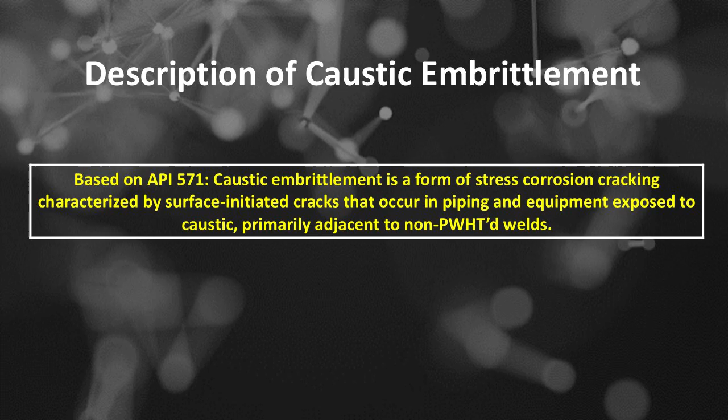Caustic stress corrosion cracking or caustic embrittlement damage mechanisms as a part of environment-assisted cracking. Description based on API 571. Caustic embrittlement is a form of stress corrosion cracking characterized by surface-initiated cracks that occur in piping and equipment exposed to caustic, primarily adjacent to non-PWHT'd welds. Here's a detailed description of caustic stress corrosion cracking or caustic embrittlement.

Introduction. Caustic stress corrosion cracking or CSCC, commonly known as caustic embrittlement, is a form of environmentally assisted cracking that occurs in metallic components exposed to caustic, alkaline environments under tensile stress. It is characterized by the initiation and propagation of cracks due to combined effects of mechanical stress and chemical environment, leading to material failure.

Fundamental mechanisms of caustic embrittlement. Chemical environment: the primary chemical agent involved is hydroxide ions, typically present in high concentrations in boiler water systems, especially in the vicinity of concentrated sodium hydroxide, potassium hydroxide, or other alkaline solutions.

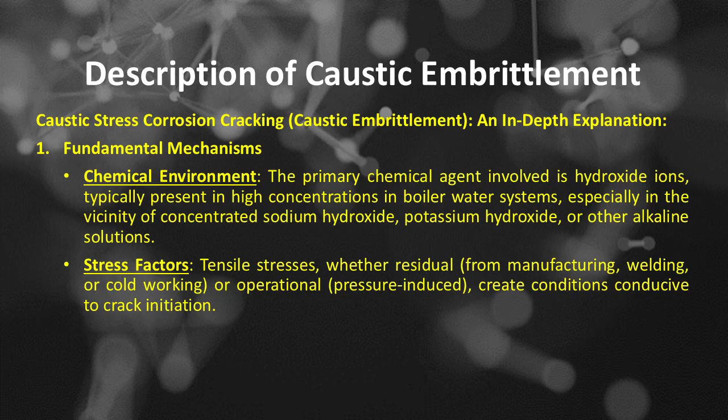Stress factors: tensile stresses, whether residual from manufacturing, welding, or cold working, or operational, pressure-induced, create conditions conducive to crack initiation. Crack initiation: surface or subsurface microstructural flaws or inclusions act as initiation sites, especially in areas of high tensile stress concentrations.

Crack propagation: once cracks form, the caustic environment facilitates crack growth via a process called caustic cracking, which is enhanced by localized chemical reactions at the crack tip, weakening the material along the crack front.

Detailed process of caustic embrittlement. A: buildup of alkaline concentration. In boiler systems, impurities such as sodium, potassium, or lithium compounds can concentrate in crevices, deposit areas, or corrosion products, raising local alkalinity. Water chemistry deviations, such as inadequate blowdown or pH control, increase the likelihood of high hydroxide ion concentration.

Process of caustic embrittlement. B: residual and operational stresses. Components like boiler tubes, welds, or fittings often harbor residual stresses from manufacturing or welding. Operating pressures induce tensile stresses that, combined with residual stresses, exceed the material's resistance to crack initiation.

Process of caustic embrittlement. C: crack initiation. Microcracks or flaws at the surface or within the material are exposed to the caustic environment. The high pH environment facilitates localized electrochemical reactions at flaws, weakening the material along grain boundaries or inclusions.

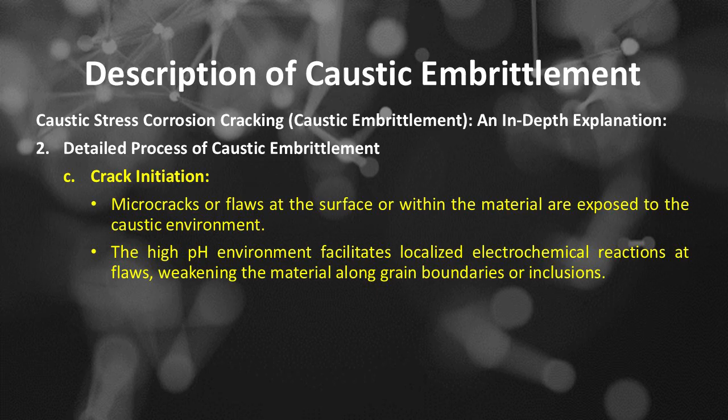Process of caustic embrittlement. D: crack growth. The caustic environment acts as an aggressive medium, promoting caustic cracking or embrittlement. The mechanism involves stress-assisted corrosion, where the chemical reactions at the crack tip cause material loss, further propagating the crack.

Process of caustic embrittlement. E: intergranular or transgranular fracture. Cracks can propagate along grain boundaries, intergranular, or through grains, transgranular, depending on alloy composition, microstructure, and environment.

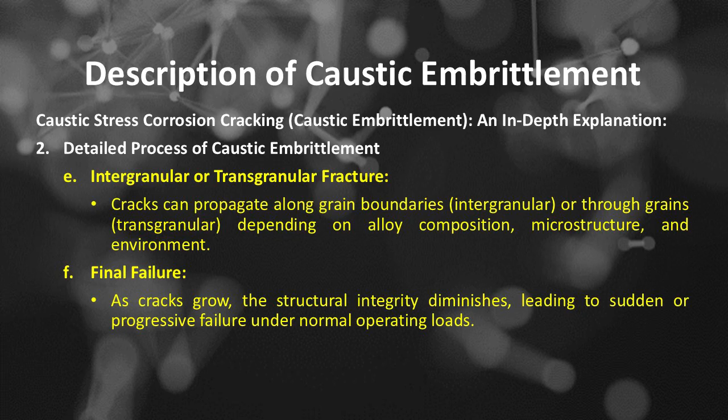Process of caustic embrittlement. F: final failure. As cracks grow, the structural integrity diminishes, leading to sudden or progressive failure under normal operating loads.

Visual symptoms and damage manifestations of caustic embrittlement: it can be visualized as cracks, usually surface breaking or subsurface cracks aligned with stress directions. It can be visualized as metal loss, localized thinning or pitting due to corrosion. It shows embrittlement zones, where areas near welds or stress concentrators show signs of cracking, and it can result in sudden failure, often occurring without significant prior warning, especially in high-stress regions.

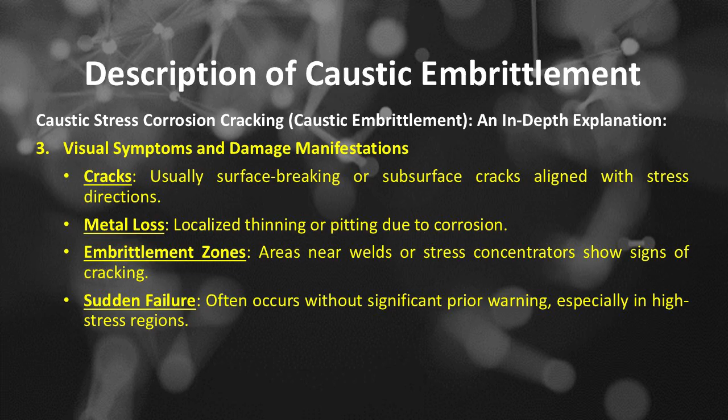Prevention and control measures of caustic embrittlement. A: water chemistry management. Maintain proper pH levels and alkalinity control, use of high-quality feedwater and effective blowdown procedures. Avoid impurity buildup in crevices or deposit zones.

Prevention and control. B: stress management. Reduce residual stresses via stress relief heat treatments. Design components to minimize stress concentrations. Regular inspection and removal of stress risers.

Prevention and control. C: material selection. Use of resistant alloys or materials less susceptible to caustic cracking. Avoiding materials prone to embrittlement in alkaline environments.

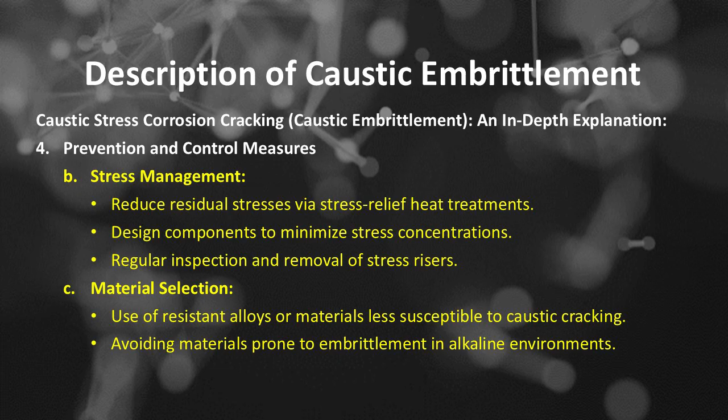Prevention and control. D: protective coatings and surface treatments, applying corrosion-resistant coatings to prevent exposure, use of surface treatments to reduce surface flaws. E: monitoring and inspection, regular non-destructive testing or NDT such as ultrasonic testing, dye penetrant, or magnetic particle inspection to detect early cracks. Monitoring water chemistry parameters continuously.

Caustic stress corrosion cracking, or caustic embrittlement, is a destructive process that occurs when tensile stresses and high alkalinity environments synergistically cause crack initiation and propagation in susceptible metals, particularly in boiler and pressure vessel systems. It is characterized by intergranular or transgranular cracking, often leading to sudden failure if not detected early.

Effective prevention involves controlling water chemistry, reducing residual stresses, selecting appropriate materials, and implementing rigorous inspection regimes. Understanding the detailed mechanisms enables engineers and maintenance personnel to design, operate, and maintain systems that are resilient against this form of environmentally assisted cracking.

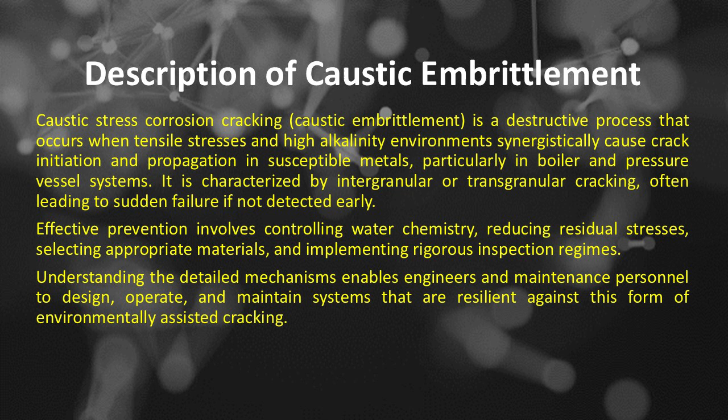Caustic stress corrosion cracking or caustic embrittlement, based on API 571, will affect carbon steel, low alloy steels, and 300 series stainless steels are susceptible.

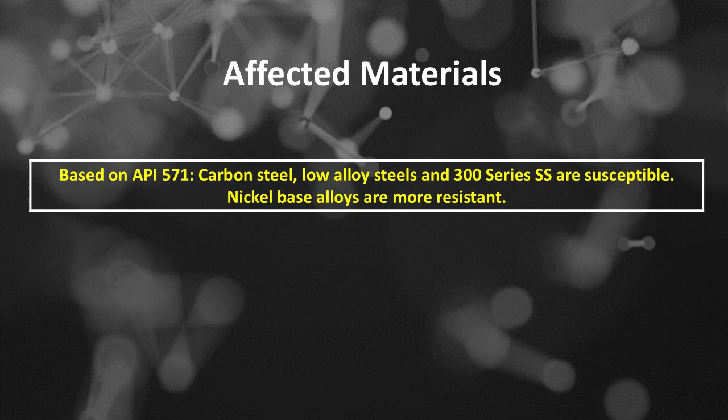Nickel base alloys are more resistant. Here's a comprehensive and detailed explanation of materials affected by caustic stress corrosion cracking or caustic embrittlement.

Overview: Caustic stress corrosion cracking, or CSCC, also known as caustic embrittlement, predominantly affects specific metals and alloys that are susceptible to chemical attack in high pH, alkaline environments under tensile stress. Understanding which materials are vulnerable is crucial for selecting appropriate materials for high-risk environments, especially in power plants, boilers, and chemical processing facilities.

Materials affected by caustic stress corrosion cracking or caustic embrittlement damage include: Number 1, primary susceptible materials. Number A, carbon steels and low alloy steels. These are the most susceptible materials to caustic embrittlement due to their microstructure and chemical composition. Carbon steels contain primarily iron and carbon, with minimal alloying elements. They are widely used in boiler components, piping, and pressure vessels. When operating in environments with high alkalinity and residual tensile stresses, cracks tend to initiate and propagate along grain boundaries, especially along microstructural features.

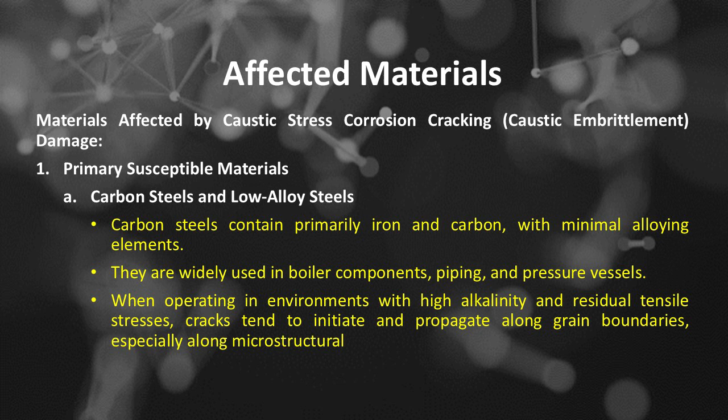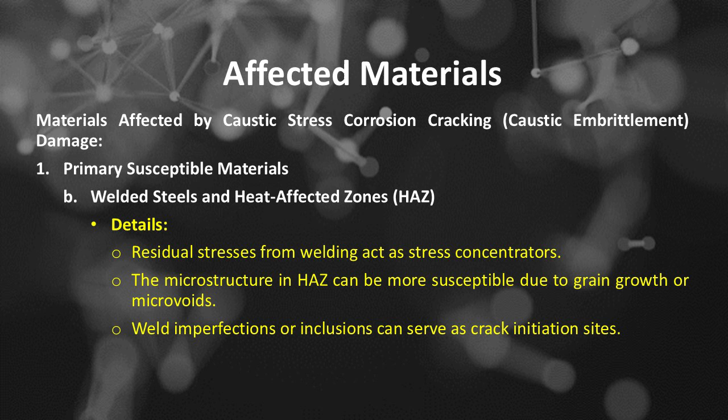Number B, welded steels and heat-affected zones. Welded joints and HAZ are particularly vulnerable because welding introduces residual stresses and microstructural changes. Here's detail of welded steels and heat-affected zones affected by CSCC: residual stresses from welding act as stress concentrators. The microstructure in the HAZ can be more susceptible due to grain growth or microvoids. Weld imperfections or inclusions can serve as crack initiation sites.

Number 2 of materials affected by caustic stress corrosion cracking or caustic embrittlement damage is susceptible alloy types, including: Number A, cast steels with certain microstructures and compositions are prone to caustic cracking. Details of cast steels affected by CSCC: especially susceptible when casting defects or microvoids exist. The coarse microstructure can facilitate crack propagation along grain boundaries.

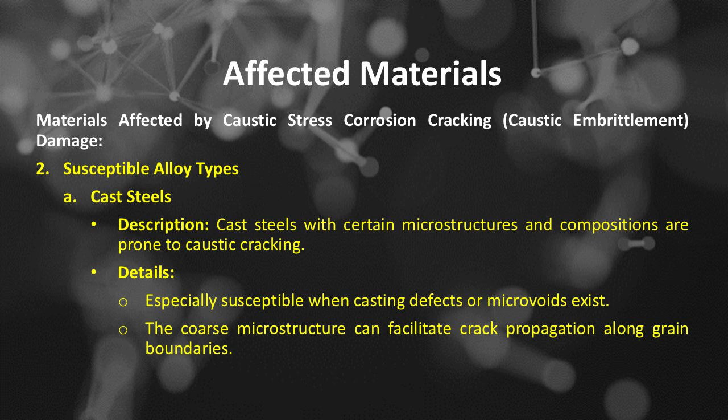Number B, low to medium alloy steels. Alloys such as low alloy steels may have some resistance but can still be affected under severe conditions. Details of low to medium alloy steels affected by CSCC: alloying elements like chromium or nickel may improve resistance but do not eliminate susceptibility entirely.

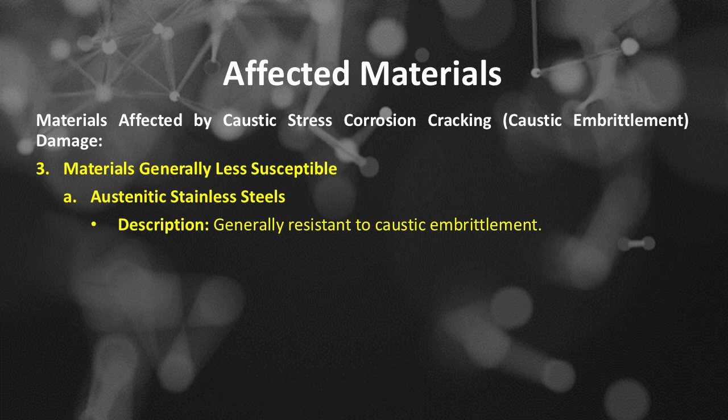Number 3 of materials affected by caustic stress corrosion cracking or caustic embrittlement damage is materials generally less susceptible, including: Number A, austenitic stainless steels, generally resistant to caustic embrittlement. Details: austenitic stainless steels, such as 304 and 316, have high chromium and nickel content, which form a protective oxide layer. They are less susceptible because their microstructure is stable in high pH environments and less prone to intergranular attack. However, under certain conditions, such as high residual stresses, very high alkalinity, or specific microstructural features, they may still be at risk.

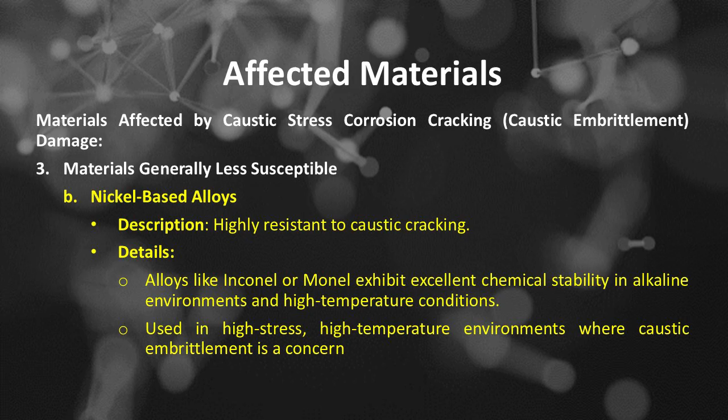Number B, nickel-based alloys, highly resistant to caustic cracking. Details of nickel-based alloys affected by CSCC: alloys like Inconel or Monel exhibit excellent chemical stability in alkaline environments and high-temperature conditions, used in high-stress, high-temperature environments where caustic embrittlement is a concern.

Number 4 of materials affected by caustic stress corrosion cracking or caustic embrittlement damage is factors influencing material susceptibility. Number A, microstructure: fine-grained structures tend to be more resistant than coarse-grained microstructures. Presence of microvoids, inclusions, or grain boundary precipitates increases susceptibility.

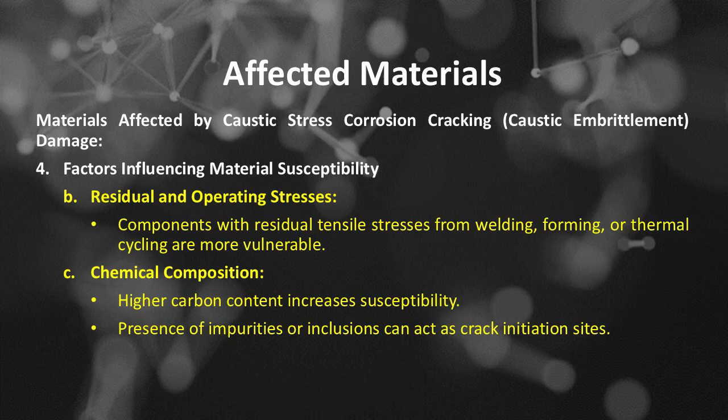Number B of factors influencing material susceptibility to caustic embrittlement is residual and operating stresses. Components with residual tensile stresses from welding, forming, or thermal cycling are more vulnerable. Number C, chemical composition: higher carbon content increases susceptibility. Presence of impurities or inclusions can act as crack initiation sites.

Number D of factors influencing material susceptibility to caustic embrittlement is temperature. Elevated temperatures, above 130 degrees Celsius or 266 degrees Fahrenheit, accelerate embrittlement mechanisms.

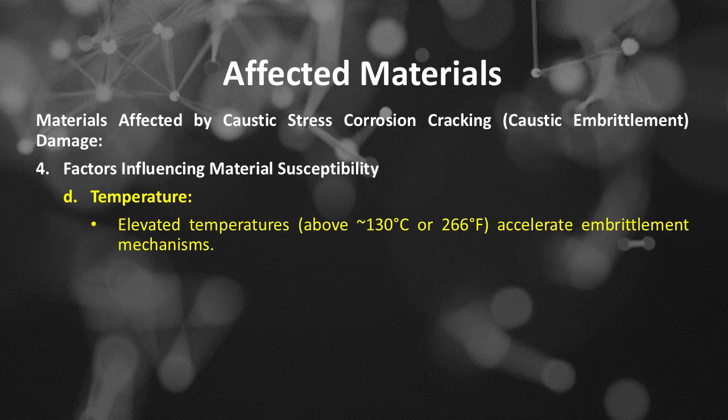In summary, carbon steels and low-alloy steels are most vulnerable to caustic stress corrosion cracking or caustic embrittlement. Their susceptibility is primarily due to their microstructure, residual stresses, and chemical composition. Welded components and heat-affected zones are particularly at risk because of residual stresses and microstructural heterogeneity. Conversely, austenitic stainless steels and nickel alloys generally have high resistance, making them suitable choices where caustic environments are present.

Proper material selection, stress management, water chemistry control, and regular inspection are vital to prevent or mitigate caustic embrittlement in susceptible materials. Caustic stress corrosion cracking, caustic embrittlement damage: critical factors based on API 571.

Number A, susceptibility to caustic embrittlement in caustic soda and caustic potash solutions is a function of caustic strength, metal temperature, and stress levels. Number B, increasing caustic concentration and increasing temperatures increase the likelihood and severity of cracking. Conditions likely to result in cracking have been established through plant experience and are presented in Figure 4-146, recommended operating limits for carbon steel in caustic service.

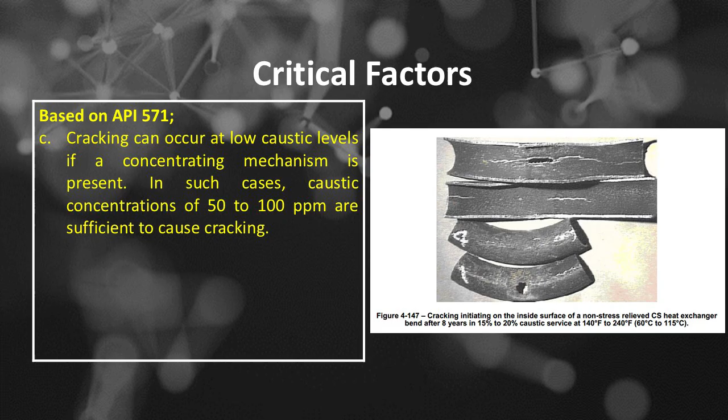Number C, cracking can occur at low caustic levels if a concentrating mechanism is present. In such cases, caustic concentrations of 50 to 100 ppm are sufficient to cause cracking. Number D, stresses that promote cracking can be residual, resulting from welding or from cold working such as bending and forming, as well as applied stresses. See Figure 4-147.

Cracking initiating on the inside surface of a non-stress relieved carbon steel heat exchanger bend after 8 years in 15% to 20% caustic service at 140 to 240 degrees Fahrenheit (60 to 115 degrees Celsius). See Figure 4-148, photomicrograph of a crack in the tube shown in Figure 4-147.

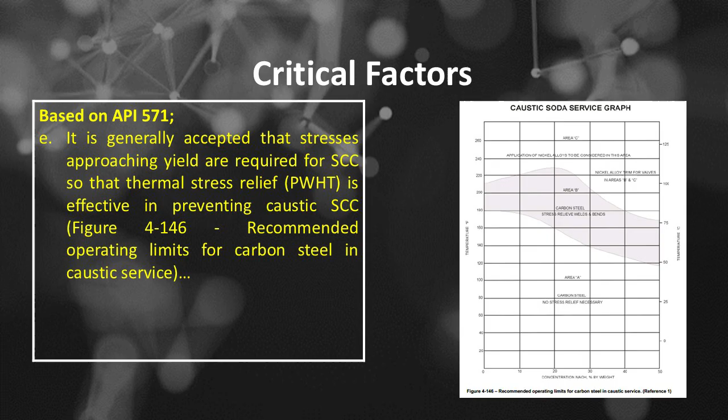It is generally accepted that stresses approaching yield are required for SCC, so thermal stress relief or PWHT is effective in preventing caustic SCC. See Figure 4-146, recommended operating limits for carbon steel in caustic service. Although failures have occurred at stresses low relative to yield, they are considered more rare.

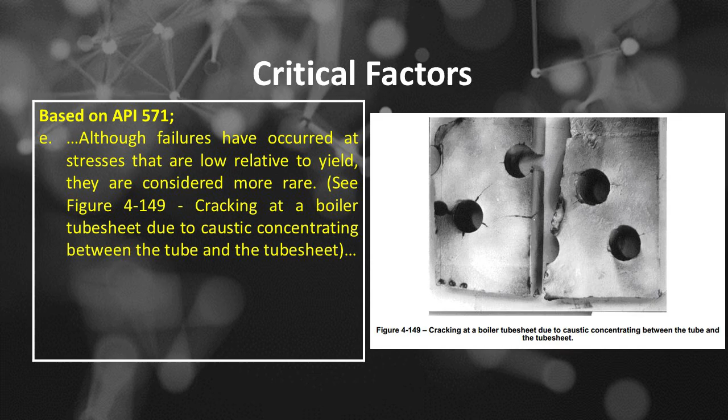See Figure 4-149, cracking at a boiler tube sheet due to caustic concentrating between the tube and the tube sheet. See Figure 4-150, photomicrograph of a crack in the tube sheet shown in Figure 4-149.

Crack propagation rates increase dramatically with temperature and can sometimes grow through wall in a matter of hours or days during temperature excursions, especially if conditions promote caustic concentration. Concentration can occur as a result of alternating wet and dry conditions, localized hot spots, or high-temperature steam out.

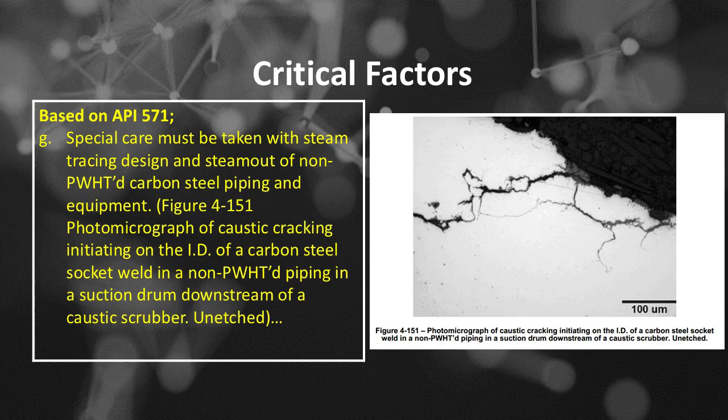Special care must be taken with steam tracing design and steam out of non-PWHT'd carbon steel piping and equipment. See Figure 4-151, photomicrograph of caustic cracking initiating on the ID of a carbon steel socket weld in non-PWHT'd piping in a suction drum downstream of a caustic scrubber, unetched. See Figure 4-152, Figure 4-151 in the etched condition.

Here's a comprehensive and detailed explanation of the critical factors influencing caustic stress corrosion cracking, or caustic embrittlement. Caustic embrittlement results from the complex interplay of environmental, material, and operational factors. Understanding these critical factors is essential for predicting, preventing, and controlling this form of damage. Here are the details of critical factors of caustic embrittlement.

Number 1 is chemical environment factors. Factor A is alkalinity, or high pH, or high concentration of hydroxide ions. Elevated concentrations of hydroxide ions increase the likelihood of caustic cracking. Localized high alkalinity often occurs in crevices, deposit areas, or regions with impurity accumulation. Excessive alkalinity facilitates localized electrochemical reactions at crack tips, weakening grain boundaries.

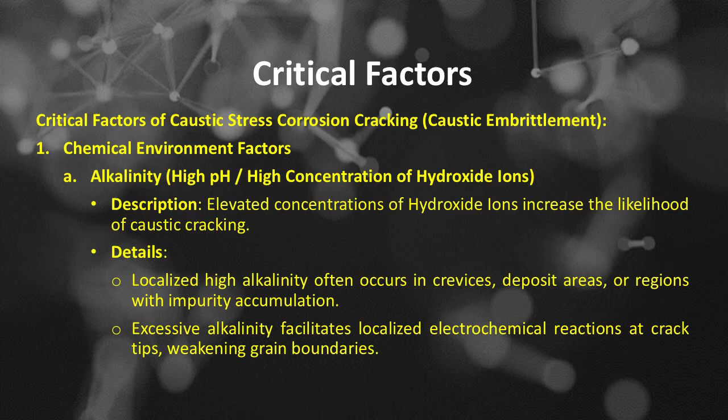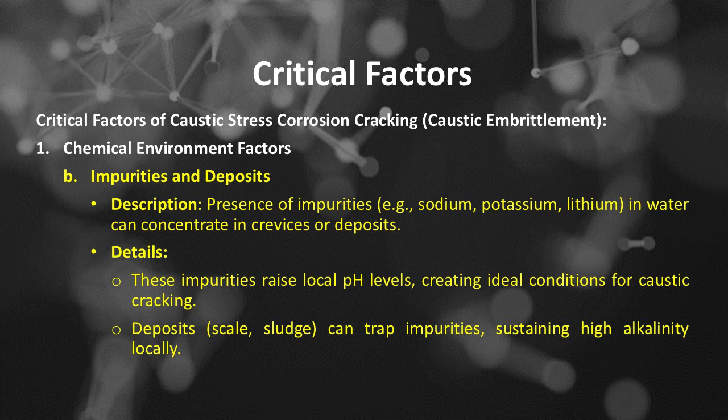Factor B of chemical environment factors is impurities and deposits. Presence of impurities, such as sodium, potassium, and lithium in water, can concentrate in crevices or deposits. These impurities raise local pH levels, creating ideal conditions for caustic cracking. Deposits, scale, and sludge can trap impurities, sustaining high alkalinity locally.

Factor C of chemical environment factors is water chemistry control. Poor water chemistry management leads to increased susceptibility. Inadequate blowdown, pH control, or impurity removal causes alkalinity buildup. Maintaining proper water chemistry is essential to reduce caustic embrittlement risk.

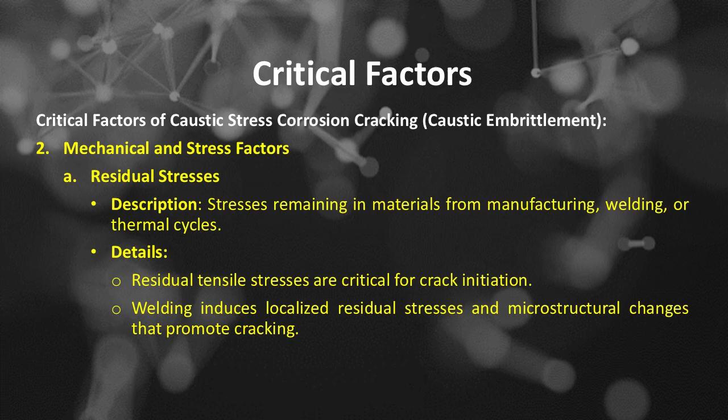Number 2 of critical factors of caustic stress corrosion cracking, or caustic embrittlement, is mechanical and stress factors, including Factor A, residual stresses: stresses remaining in materials from manufacturing, welding, or thermal cycles. Residual tensile stresses are critical for crack initiation. Welding induces localized residual stresses and microstructural changes that promote cracking.

Factor B of mechanical and stress factors is operating stresses: external or internal stresses due to pressure, temperature, or operational loads. High internal pressure in boilers or pipes causes tensile stresses. Thermal stresses during startup/shutdown cycles contribute to stress levels.

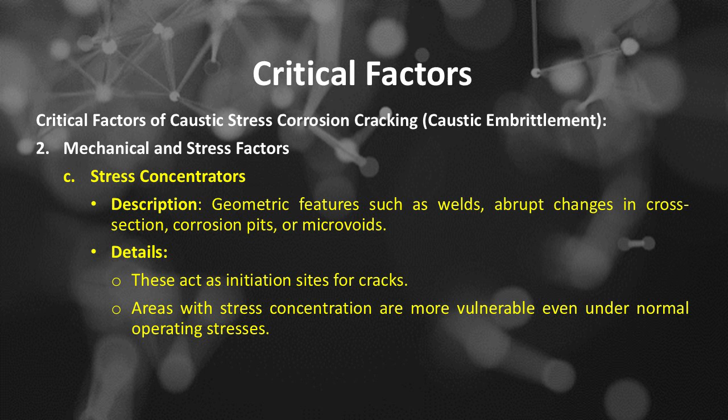Factor C of mechanical and stress factors is stress concentrators: geometric features such as welds, abrupt changes in cross-section, corrosion pits, or microvoids. These act as initiation sites for cracks. Areas with stress concentration are more vulnerable even under normal operating stresses.

Material factors of caustic embrittlement include Factor A, microstructure and composition: microstructural features influence susceptibility. Critical factors include coarse-grained microstructures and grain boundary precipitates that facilitate crack initiation. High carbon content and certain inclusions increase vulnerability. Microvoids and microcracks serve as initiation points.

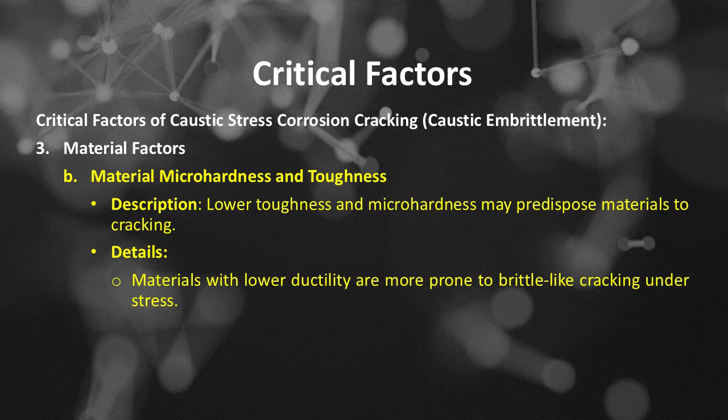Factor B of material factors of caustic embrittlement is material microhardness and toughness: lower toughness and microhardness may predispose materials to cracking. Materials with lower ductility are more prone to brittle-like cracking under stress.

Factor C of material factors of caustic embrittlement is microstructural changes from welding: welding modifies the microstructure and induces residual stresses. Heat-affected zones often have altered grain structures that are more susceptible.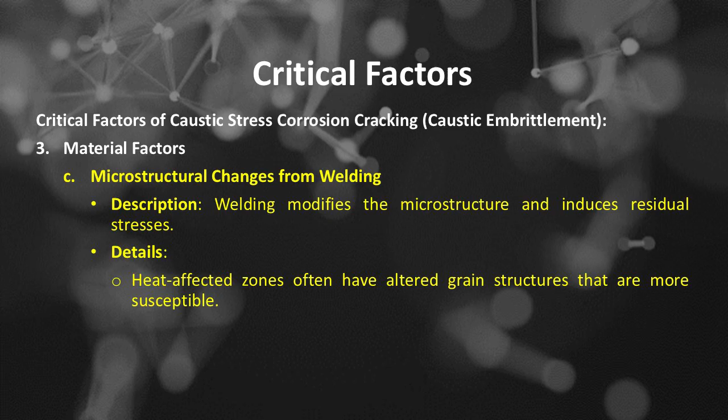Critical factor number 4 is environmental and operational factors, including temperature. Elevated temperatures accelerate chemical reactions and embrittlement processes. Temperatures above approximately 130 degrees Celsius (266 degrees Fahrenheit) increase susceptibility. Higher temperatures also reduce material toughness.

Environmental and operational factor B is duration of exposure. Longer exposure times allow cracks to initiate and propagate. Cumulative effects over operational cycles increase damage likelihood.

Environmental and operational factor C is presence of crevices or deposit areas, where water chemistry cannot be easily controlled. Crevices, deposit layers, or areas with poor circulation trap impurities and concentrate alkalinity.

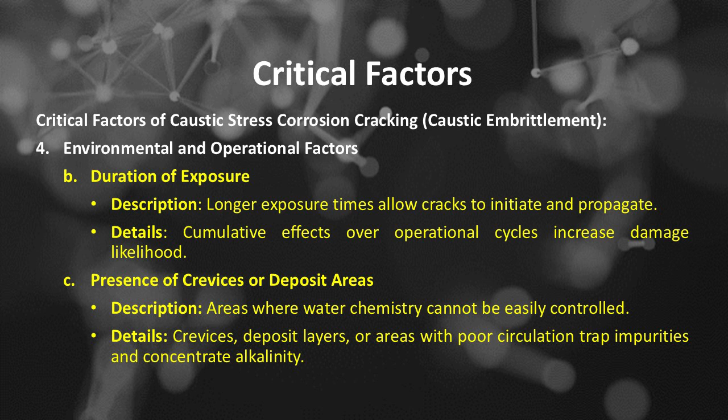Additional critical factors of caustic stress corrosion cracking, or caustic embrittlement: Factor A, microstructural heterogeneities. Variations in microstructure, such as grain size and inclusions, serve as nucleation sites for crack initiation.

Additional factor B, surface conditions: surface roughness, corrosion pits, or flaws. Surface imperfections act as stress concentrators and crack initiation sites.

Additional factor C, component design: design features influencing flow and chemical distribution. Poorly designed systems may promote crevice formation and localized chemical environments.

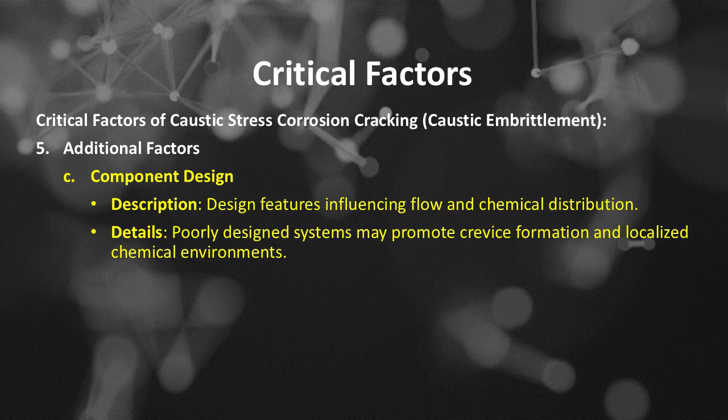Interdependence: these factors often act synergistically. For example, residual stresses combined with high alkalinity in crevices significantly increase the risk.

Control strategies: to mitigate caustic embrittlement, it is essential to manage water chemistry, minimize residual stresses, avoid design features that promote crevice formation, and select resistant materials.

Caustic stress corrosion cracking or caustic embrittlement damage affected units or equipment based on API 571. A, caustic embrittlement is often found in piping and equipment that handles caustic, including H2S and mercaptan removal units, as well as equipment that uses caustic for neutralization in sulfuric acid alkylation units and HF alkylation units.

Caustic is sometimes injected into the feed to the crude tower for chloride control. B, failures have occurred in improperly heat-traced piping or equipment as well as heating coils and other heat transfer equipment. C, caustic embrittlement may occur in equipment as a result of steam cleaning after being in caustic service.

D, traces of caustic can become concentrated in BFW and can result in caustic embrittlement of boiler tubes that alternate between wet and dry conditions due to overfiring.

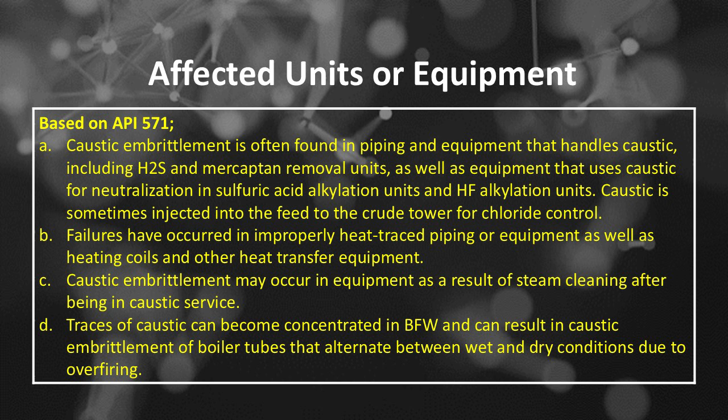Here's a detailed explanation of the units and equipment affected by caustic stress corrosion cracking or caustic embrittlement. Caustic embrittlement predominantly impacts equipment and units operating in high-temperature, high-alkalinity environments, especially within thermal power plants, chemical processing facilities, and other industrial systems involving boiler and piping components.

Units and equipment affected by caustic embrittlement: number 1 is boilers and boiler components, includes A, boiler shells and pressure parts. The boiler shell and pressure vessels are exposed to high-temperature water or steam, making them highly susceptible.

Caustic cracking can initiate along welds, microvoids, or microcracks in the shell or tube sheets. Corrosion and cracking often occur in crevice-like regions where deposits or scale concentrate alkalinity.

B, water walls and refractory-lined sections. The water walls, furnace walls with water tubes, are exposed to hot, high alkaline water, especially in areas with poor water circulation or deposit buildup.

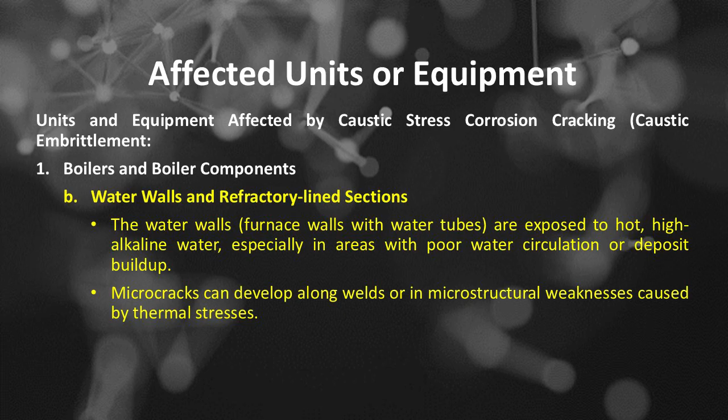Microcracks can develop along welds or in microstructural weaknesses caused by thermal stresses. Boiler component C, economizer and superheater tubes. These tubes operate at high temperatures and are exposed to corrosive environments, especially when deposit buildup occurs. Cracks can propagate along welds or at locations with residual stress.

Next, number 2 of units and equipment affected by caustic embrittlement is piping systems, includes A, high-pressure steam and water pipelines. Piping conveying superheated steam or hot water can develop cracks, especially at weld joints, bends, or constrictions. Areas with crevice-like features or deposits are more vulnerable.

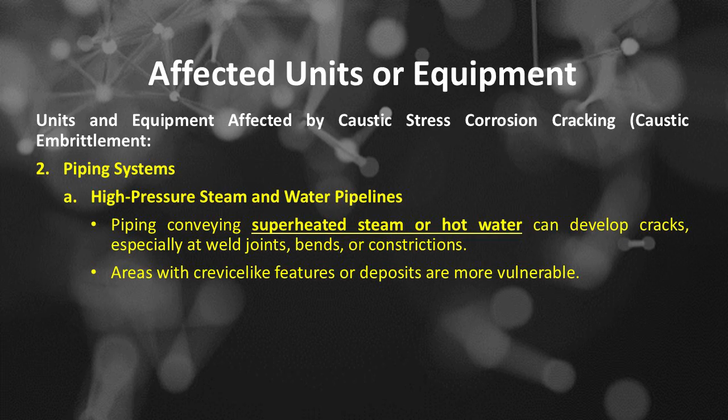Piping systems B, feed water and condensate lines. These lines often contain high pH water and are susceptible to caustic attack at welds or microvoids. Microcracking may occur during thermal cycling.

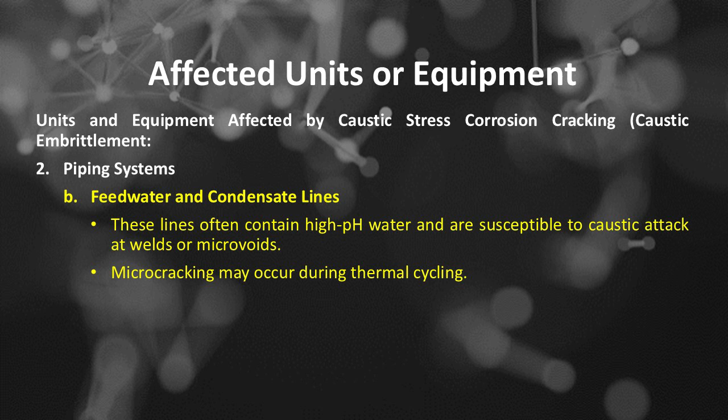Number 3 of units and equipment affected by caustic embrittlement is welded joints and heat-affected zones. Welds are common sites for crack initiation due to residual stresses and microstructural changes. The HAZ experiences grain growth and microstructural heterogeneity, making it vulnerable. Cracks often propagate along grain boundaries in the weld metal or HAZ.

Number 4 of units and equipment affected by caustic embrittlement is valves and fittings. Valves, especially those with welds or microstructural discontinuities, are at risk. Cracking can occur at sealing surfaces or in the body due to residual stresses and high-temperature caustic environment.

Number 5 of units and equipment affected by caustic embrittlement is supercritical and ultra-supercritical units. These advanced units operate at very high pressures and temperatures. The associated components such as turbine blades, casings, and boiler pressure parts can be affected, especially if water chemistry is not properly controlled.

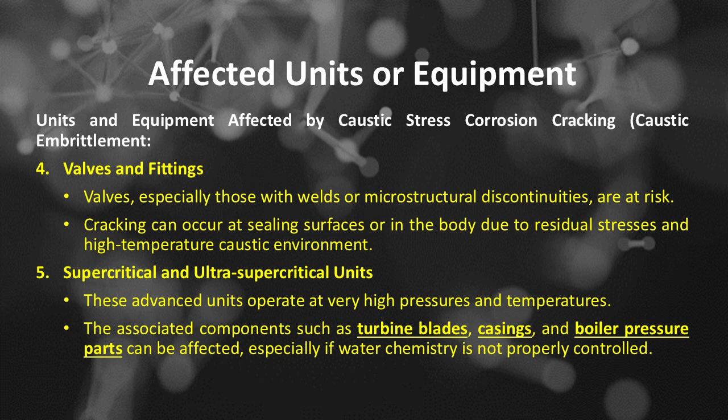Number 6 of units and equipment affected by caustic embrittlement is condensers and heat exchangers. Although less common, areas with high residual stresses or microstructural heterogeneity can suffer from caustic cracking if exposed to high alkaline environments.

Number 7 of units and equipment affected by caustic embrittlement is chemical reactors and processing units. In chemical industry, equipment handling high pH chemicals or operating at high temperatures and pressures may be vulnerable. Welded vessels, piping, and reactors are susceptible if operating conditions favor caustic embrittlement.

Additional insights of caustic stress corrosion cracking or caustic embrittlement. Location-specific vulnerability: caustic embrittlement tends to occur inside crevices or deposit areas where high pH conditions develop locally. Welded areas are high-risk zones because of residual stresses and microstructural changes.

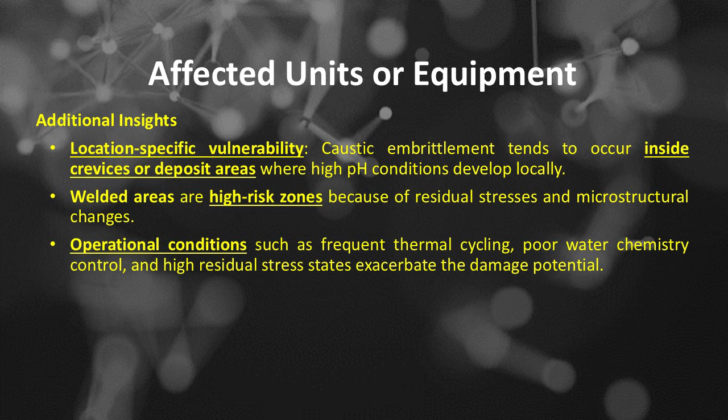Operational conditions such as frequent thermal cycling, poor water chemistry control, and high residual stress states exacerbate the damage potential.

Appearance or morphology of caustic stress corrosion cracking or caustic embrittlement based on API 571. Number A: Caustic stress corrosion cracking typically propagates parallel to the weld and adjacent base metal but can also occur in the weld deposit or heat-affected zones. Number B: The pattern of cracking observed on the steel surface is sometimes described as a spider web of small cracks which often initiate at or interconnect with weld-related flaws that serve as local stress risers.

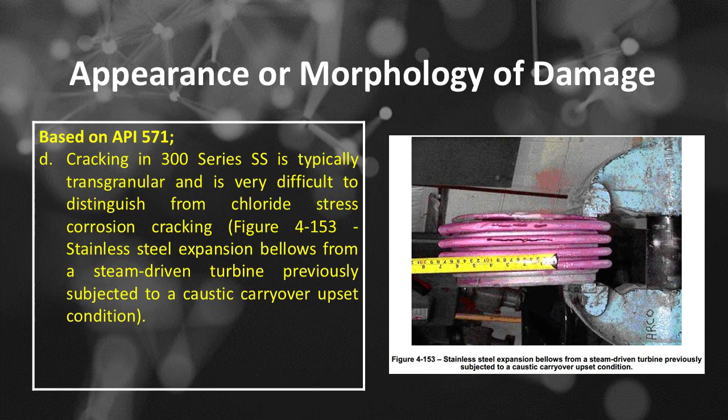Number C: Cracks can be confirmed through metallographic examination as surface-breaking flaws that are predominantly intergranular. The cracking typically occurs in as-welded carbon steel fabrications as a network of very fine, oxide-filled cracks. Number D: Cracking in 300 series SS is typically transgranular and is very difficult to distinguish from chloride stress corrosion cracking. See Figure 4-153: Stainless steel expansion bellows from a steam-driven turbine previously subjected to a caustic carryover upset condition.

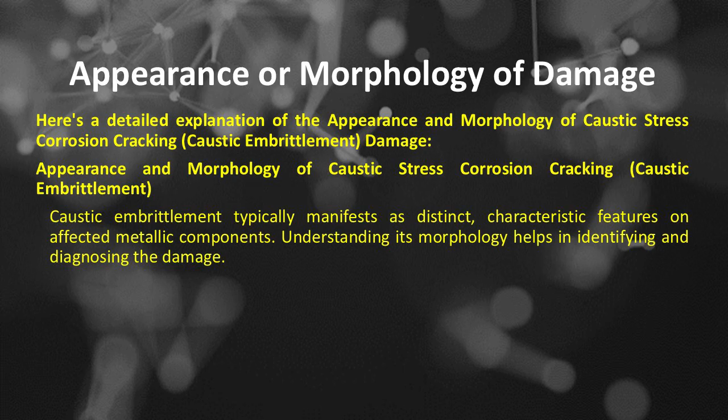Here's a detailed explanation of the appearance and morphology of caustic stress corrosion cracking, or caustic embrittlement damage. Caustic embrittlement typically manifests as distinct, characteristic features on affected metallic components. Understanding its morphology helps in identifying and diagnosing the damage.

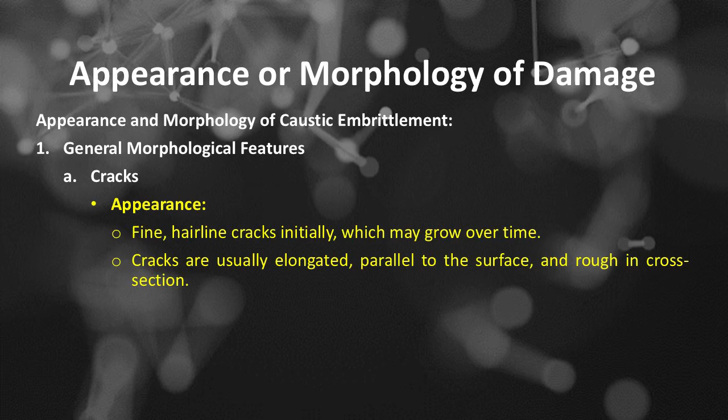Number 1 is general morphological features, includes: number A, cracks, often intergranular along grain boundaries, but can also be transgranular depending on severity. Appearance of cracks: fine, hairline cracks initially, which may grow over time. Cracks are usually elongated, parallel to the surface, and rough in cross-section. They often propagate along grain boundaries due to localized chemical attack and stress concentration. Cracks may be wavy or straight depending on the microstructure and stress distribution.

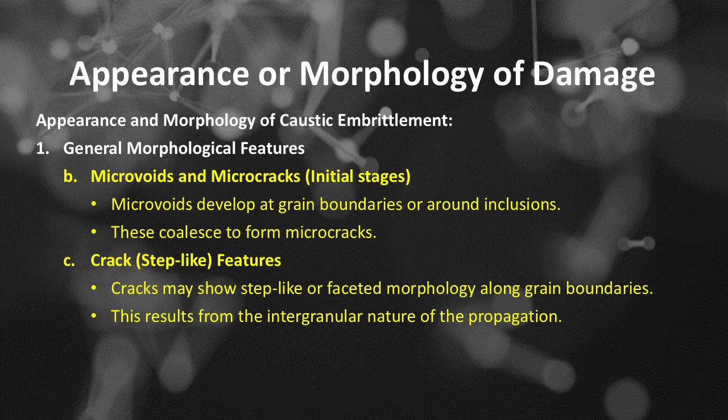Feature number B: microvoids and microcracks. In initial stages, microvoids develop at grain boundaries or around inclusions. These coalesce to form microcracks. Feature number C: crack features. Step-like features - cracks may show step-like or faceted morphology along grain boundaries. This results from the intergranular nature of the propagation.

Appearance and morphology of caustic embrittlement. Number 2 is surface features, includes: number A, fracture surface morphology or brittle appearance. The fracture surface tends to be smooth and shiny, brittle fracture, or dull and granular depending on the microstructure. Brittle fracture surfaces often show cleavage facets or intergranular fracture features.

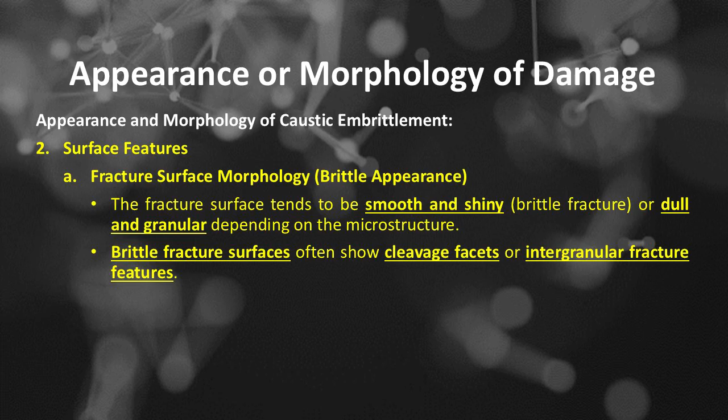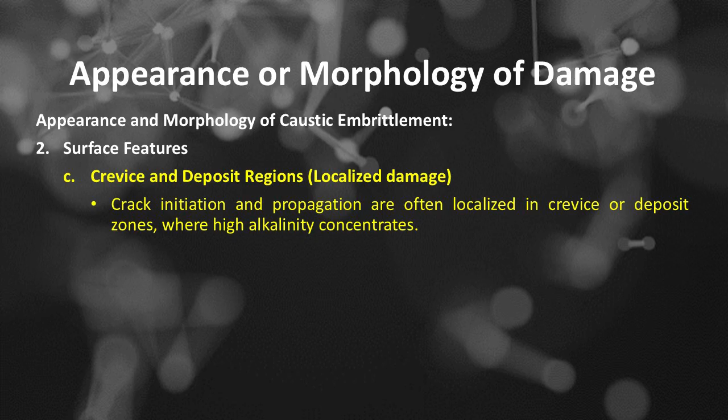Surface features. Number B: corrosion pits and deposits. Areas with scale buildup or residues of deposits often correlate with crack initiation sites. Pitting corrosion may be observed in conjunction with cracking. Surface features. Number C: crevice and deposit regions, or localized damage. Crack initiation and propagation are often localized in crevice or deposit zones, where high alkalinity concentrates.

Appearance and morphology of caustic embrittlement. Number 3 is microstructural features, includes: number A, grain boundary attack appears as micrographs reveal intergranular cracks along grain boundaries. Grain boundaries may appear widened or etched due to corrosion. Number B: inclusion and secondary phase attack. Corrosion may be concentrated around inclusions or microconstituents, leading to microvoid formation.

Appearance and morphology of caustic embrittlement. Number 4 is crack propagation morphology, includes: number A, intergranular propagation. Cracks tend to follow grain boundaries, often resulting in intergranular fracture. The crack path can be irregular, wavy, or step-like. Grain boundaries may appear widened or etched due to corrosion. Number B: transgranular propagation - less common but can occur in severe cases, with cracks crossing grains and exhibiting cleavage facets.

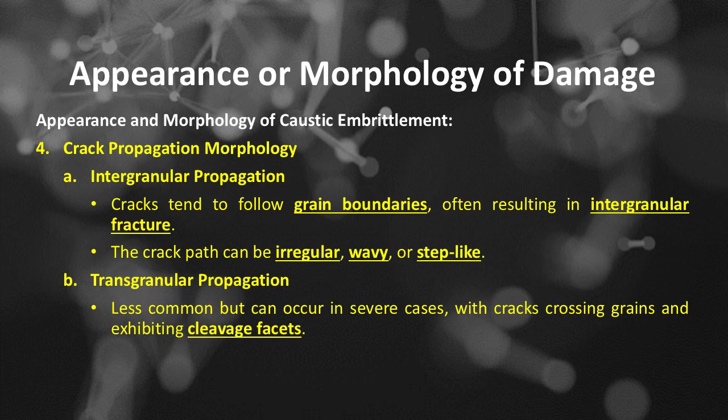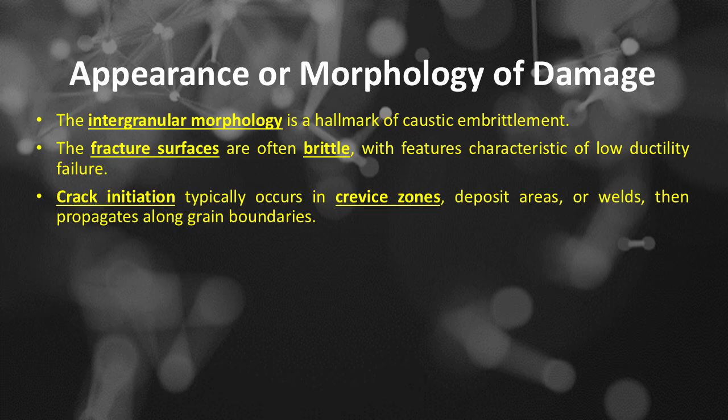The intergranular morphology is a hallmark of caustic embrittlement. The fracture surfaces are often brittle, with features characteristic of low ductility failure. Crack initiation typically occurs in crevice zones, deposit areas, or welds, then propagates along grain boundaries.

Caustic embrittlement prevention and mitigation based on API 571. Number A: cracking can be effectively prevented by means of a stress-relieving heat treatment, such as PWHT. A heat treatment at 1150 degrees Fahrenheit, or 621 degrees Celsius, is considered an effective stress-relieving heat treatment for carbon steel. The same requirement applies to repair welds and to internal and external attachment welds.

Number B: 300 series SS offer little advantage in resistance to cracking over CS. Number C: nickel-base alloys are more resistant to cracking and may be required at higher temperatures and/or caustic concentrations. Number D: steam out of non-PWHT'd carbon steel piping and equipment should be avoided. Equipment should be water washed before steam out. Where steam out is required, only low-pressure steam should be used for short periods of time to minimize exposure.

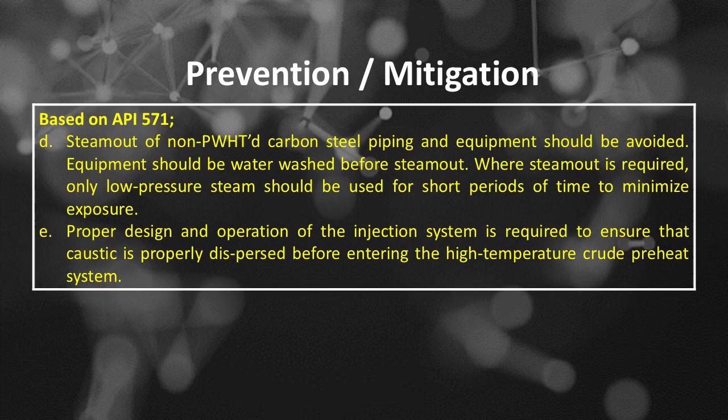Number E: proper design and operation of the injection system is required to ensure that caustic is properly dispersed before entering the high-temperature crude preheat system. Here's a comprehensive, detailed explanation of prevention and mitigation strategies for caustic stress corrosion cracking or caustic embrittlement. Caustic embrittlement is a form of environmentally assisted cracking that occurs when high alkalinity, caustic soda, NaOH, in high-temperature water interacts with residual or applied stresses in susceptible metals, especially in boiler and high-pressure systems.

Preventing and mitigating this damage involves controlling water chemistry, design considerations, material selection, and operational practices. Here is a comprehensive, detailed explanation of prevention and mitigation of caustic stress corrosion cracking or caustic embrittlement.

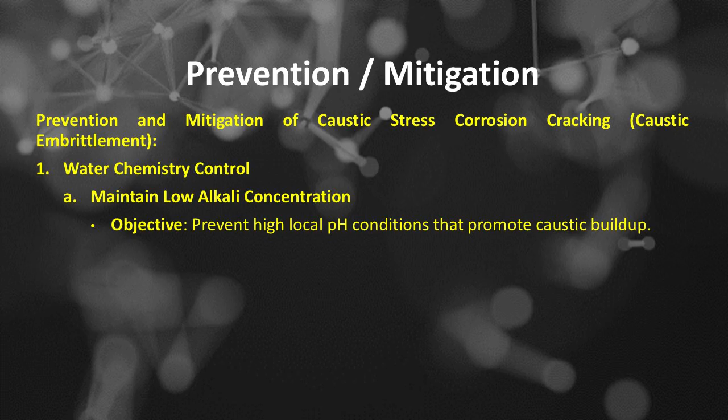Number 1, water chemistry control. Number A, maintain low alkali concentration, preventing high local pH conditions that promote caustic buildup. Methods include using high-quality, well-conditioned feedwater with controlled pH, adding phosphate treatments such as sodium phosphate to precipitate and remove free caustic, and using ammonia or hydrazine to adjust pH to acceptable levels, ensuring it remains below critical thresholds.

Number B of water chemistry control is use of proper oxygen control. Its objective is to minimize corrosion products that can deposit and concentrate alkalinity. Methods include maintaining adequate oxygen levels or deaerating to reduce corrosion and oxygen-related deposits, and using oxygen scavengers to remove residual oxygen.

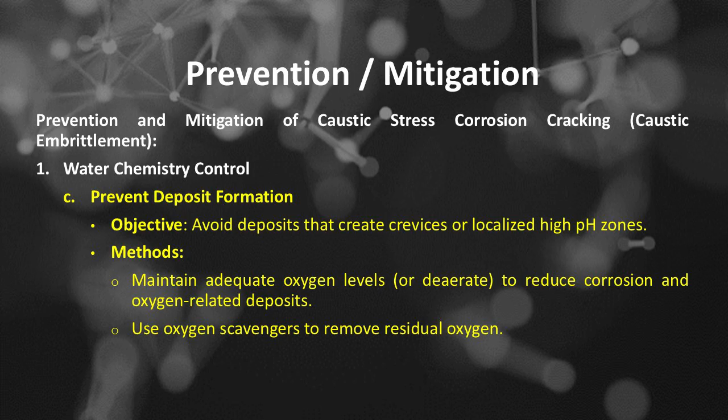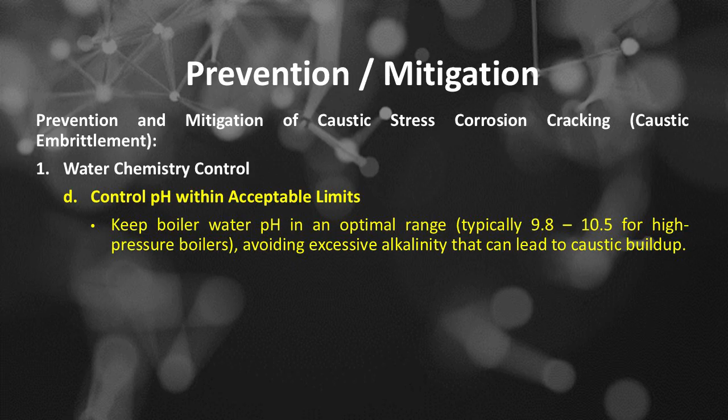Number C of water chemistry control is prevent deposit formation, with the objective to avoid deposits that create crevices or localized high pH zones. Methods include regular blowdown to remove accumulated sludge and scale, and use of filtration and softening to prevent mineral deposits. Number D of water chemistry control is control pH within acceptable limits, keeping boiler water pH in an optimal range, typically 9.8 to 10.5 for high-pressure boilers, avoiding excessive alkalinity that can lead to caustic buildup.

Number 2 of prevention and mitigation of caustic stress corrosion cracking or caustic embrittlement is design and material selection. Number A, use of resistant materials. The objective is to reduce susceptibility to caustic embrittlement, for example, austenitic stainless steels, nickel-based alloys, or other corrosion-resistant materials. Avoid high-strength ferritic steels or materials known to be susceptible to caustic cracking.

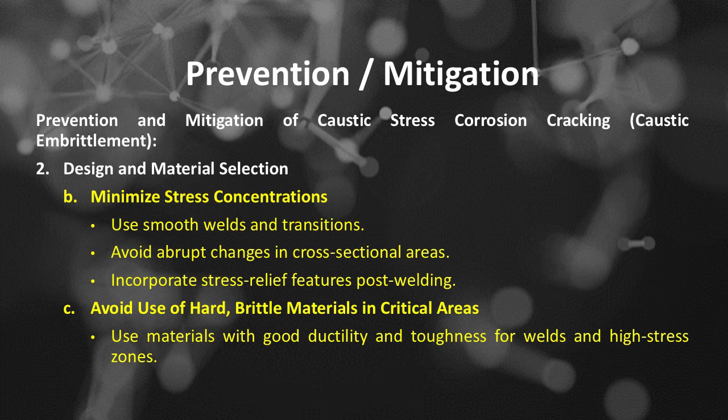Design and material selection, number B, minimize stress concentrations. Design considerations include using smooth welds and transitions, avoiding abrupt changes in cross-sectional areas, and incorporating stress relief features post-welding. Number C is avoid use of hard, brittle materials in critical areas; use materials with good ductility and toughness for welds and high-stress zones.

Number 3 of prevention and mitigation of caustic stress corrosion cracking or caustic embrittlement is operational practices, including number A, stress reduction or stress relief: perform post-weld heat treatment (PWHT) where applicable, use controlled thermal cycling to reduce residual stresses, and limit startup and shutdown stresses through proper procedures.

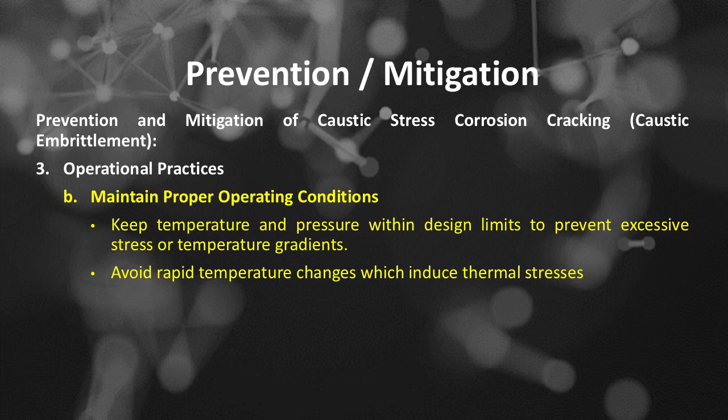Operational practices, number B, maintain proper operating conditions: keep temperature and pressure within design limits to prevent excessive stress or temperature gradients, and avoid rapid temperature changes which induce thermal stresses.

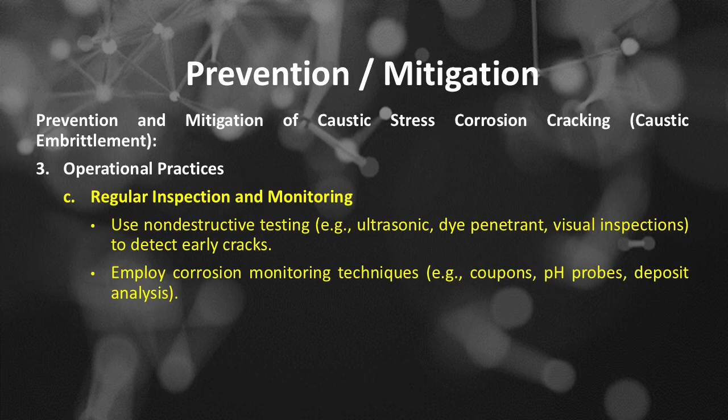Operational practices, number C, regular inspection and monitoring: use non-destructive testing, such as ultrasonic, dye-penetrant, and visual inspections, to detect early cracks, and employ corrosion monitoring techniques such as coupons, pH probes, and deposit analysis.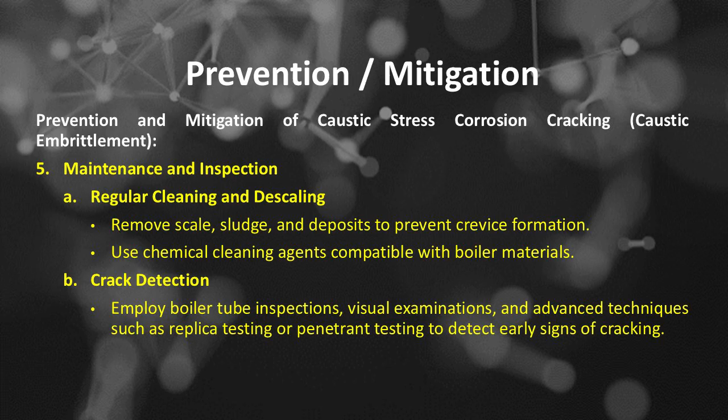Number 5 of prevention and mitigation of caustic stress corrosion cracking or caustic embrittlement is maintenance and inspection, including number A, regular cleaning and descaling: remove scale, sludge, and deposits to prevent crevice formation, using chemical cleaning agents compatible with boiler materials. Number B, crack detection: employ boiler tube inspections, visual examinations, and advanced techniques such as replica testing or penetrant testing to detect early signs of cracking. Number C, repair and replacement: promptly repair or replace cracked or compromised components to prevent catastrophic failure.

Continuing prevention and mitigation, operational strategies in high-risk areas include number A, control crevice and crevice-like environments: design welds and joints to minimize crevice formation, and avoid stagnant zones where high alkalinity can concentrate. Number B, use of protective coatings or linings: apply suitable coatings to prevent direct contact of susceptible metals with caustic solutions.

Prevention of caustic embrittlement requires an integrated approach combining water chemistry control, design considerations, material selection, and operational practices. Maintaining optimal conditions and vigilant inspection are essential to prevent the initiation and propagation of cracks, thus ensuring the integrity and safety of high-temperature, high-pressure equipment.

Caustic stress corrosion cracking or caustic embrittlement prevention and mitigation based on API 571, number A: although cracks may be seen visually, crack detection is best performed with WFMT-EC, RT, or ACFM techniques. Surface preparation by grit blasting, high-pressure water blasting, or other methods is usually required. Number B, PT may not be effective for finding tight, scale-filled cracks and should not be used as the only means of detection. Number C, fine cracks may be difficult to find with RT.

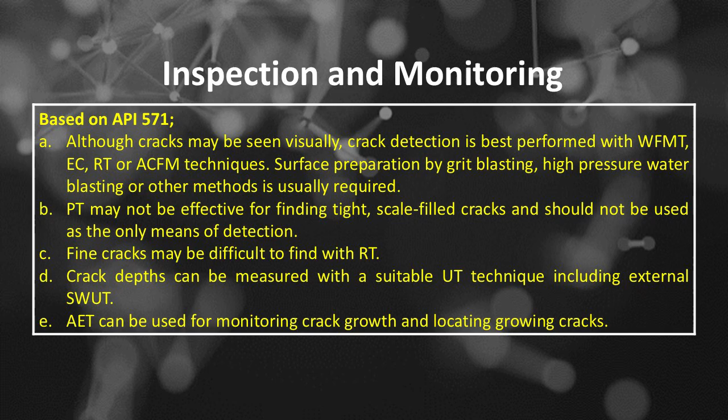Number D, crack depths can be measured with a suitable UT technique including external SWUT. Number E, AET can be used for monitoring crack growth and locating growing cracks.

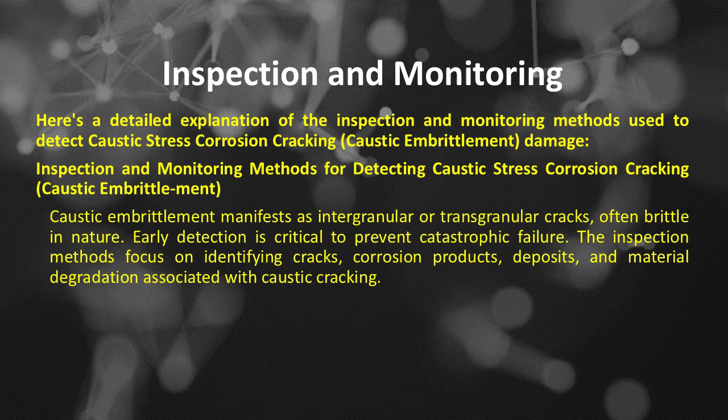Here's a detailed explanation of the inspection and monitoring methods used to detect caustic stress corrosion cracking or caustic embrittlement damage. Caustic embrittlement manifests as intergranular or transgranular cracks, often brittle in nature. Early detection is critical to prevent catastrophic failure. The inspection methods focus on identifying cracks, corrosion products, deposits, and material degradation associated with caustic cracking. Here's a detailed overview of inspection and monitoring methods for detecting caustic stress corrosion cracking or caustic embrittlement.

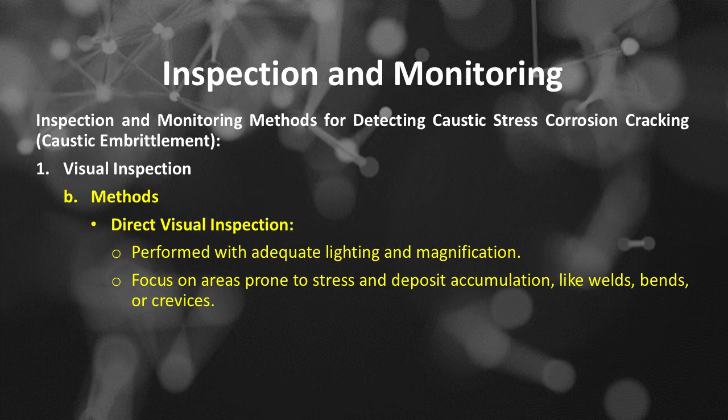Number 1 is visual inspection. It is purposed to identify surface indications such as cracks, corrosion deposits, discoloration, or surface roughness. The first method in use for visual inspection is direct visual inspection, performed with adequate lighting and magnification. Focus on areas prone to stress and deposit accumulation, like welds, bends, or crevices.

The second visual inspection method is remote visual inspection, or RVI, use of borescopes or videoscopes for internal surfaces, especially inside boilers or pipes. Indicators of damage when performing visual inspection include cracks - fine, hairline, intergranular cracks often visible as lines or discoloration; deposits - scale, sludge, or caustic deposits indicating high alkalinity zones; corrosion features - pitting or roughness near welds or crevices.

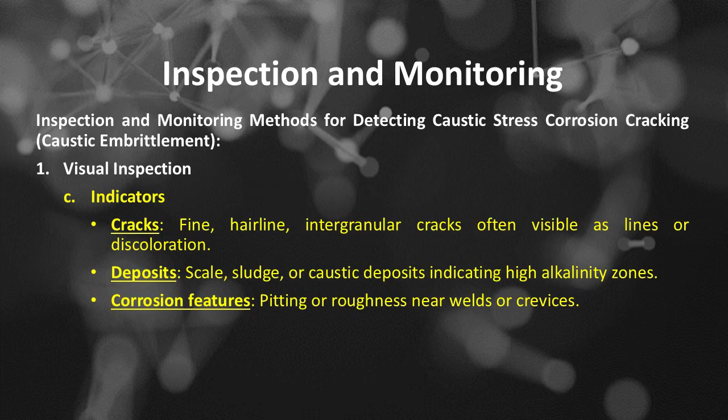Inspection and monitoring methods for detecting caustic embrittlement. Number 2 is dye penetrant testing or DPT. It is purposed to detect surface breaking cracks, especially fine intergranular cracks that are visible under magnification. DPT procedure includes clean the surface thoroughly, apply penetrating dye, allow adequate dwell time, remove excess dye and apply a developer. Cracks filled with dye will appear as colored indications.

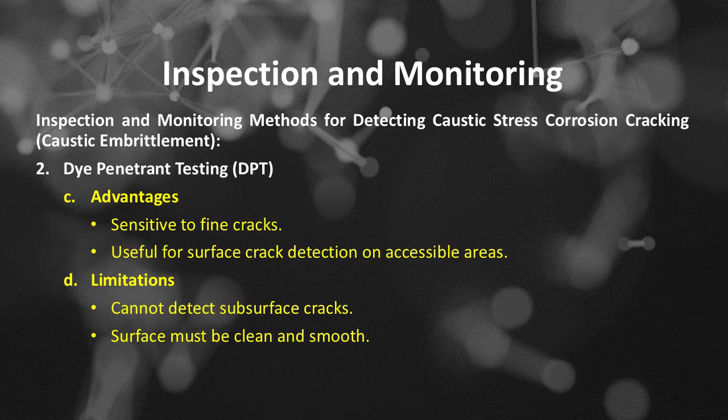The advantages of dye penetrant testing are sensitivity to fine cracks and usefulness for surface crack detection on accessible areas. The limitations of dye penetrant testing are it cannot detect subsurface cracks, and the surface to be inspected must be clean and smooth. Inspection and monitoring methods for detecting caustic embrittlement.

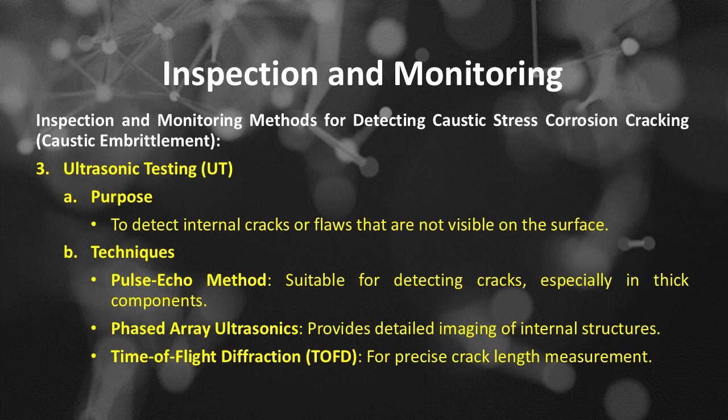Number 3 is ultrasonic testing or UT. UT is purposed to detect internal cracks or flaws that are not visible on the surface. Here's a few UT techniques that can be used to detect caustic embrittlement: includes the pulse-echo method, suitable for detecting cracks especially in thick components; phased array ultrasonics, which provides detailed imaging of internal structures; and time of flight diffraction, or TOFD, for precise crack length measurement.

Ultrasonic testing is applied to scan welds, thick sections, or areas with high residual stresses, and detect internal intergranular or transgranular cracks. The limitations of ultrasonic testing are it requires skilled operators, and may be less sensitive for very small cracks.

Inspection and monitoring methods for detecting caustic embrittlement. Number 4 is replicating or replica techniques. It is purposed to examine surface micro cracks without damaging the component. Here's the procedure of replica techniques: apply a polymethyl methacrylate, or PMMA, or nylon replica material onto the surface; after curing, remove the replica; examine under a microscope, optical or SEM, for crack morphology and density.

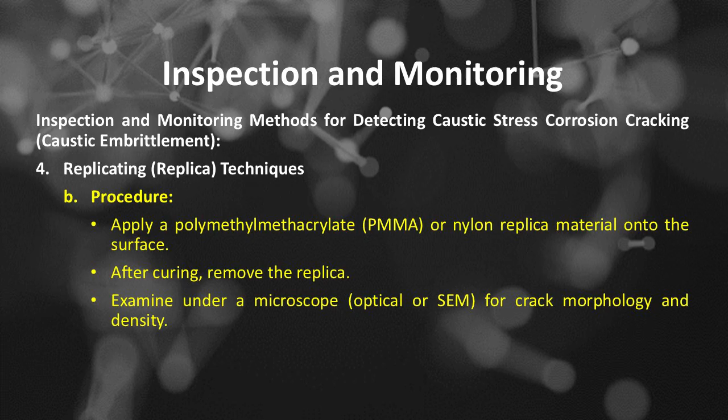The advantages of replica techniques: it allows detailed microstructural analysis, suitable for monitoring crack growth over time. Inspection and monitoring methods for detecting caustic embrittlement. Number 5 is microstructural and metallographic examination. It is purposed to analyze crack initiation sites and propagation mechanisms at the microscopic level.

Microstructural and metallographic technique procedures: prepare metallographic samples, use optical microscopy or scanning electron microscopy (SEM) to investigate crack paths, grain boundary attack, and corrosion features. This examination is applied to confirm the intergranular nature of cracks and to identify corrosion deposits and microvoids.

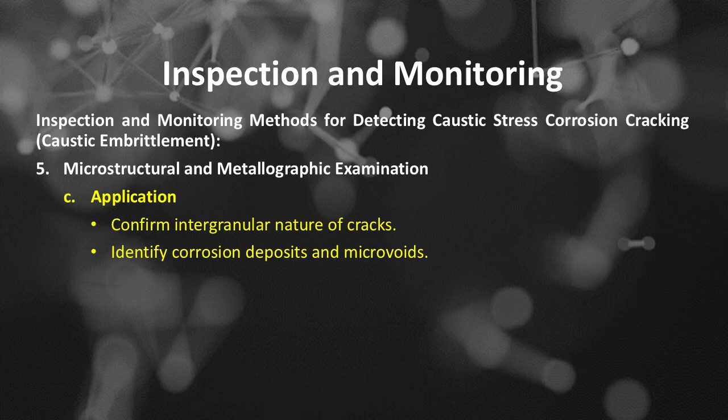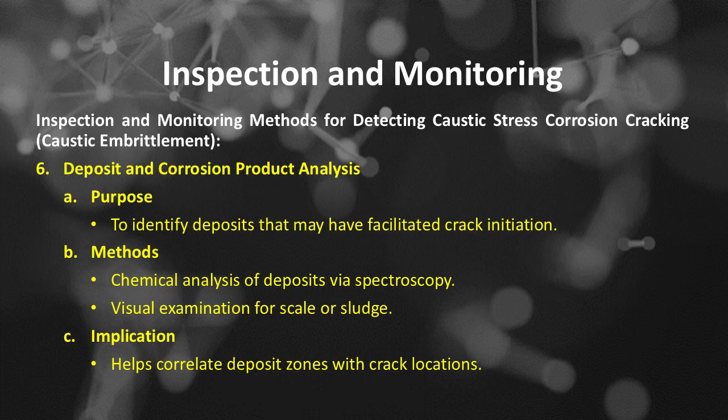Inspection and monitoring methods for detecting caustic embrittlement. Number 6 is deposit and corrosion product analysis. It is purposed to identify deposits that may have facilitated crack initiation. Methods to detect deposit and corrosion include chemical analysis of deposits via spectroscopy, and visual examination for scale or sludge. The implication is to help correlate deposit zones with crack locations.

Inspection and monitoring methods for detecting caustic embrittlement. Number 7 is monitoring techniques, including: A, corrosion coupons and probes - place metal coupons in service to monitor corrosion rates and crack-related degradation, and use pH probes and electrochemical sensors to monitor water chemistry, especially pH and alkalinity.

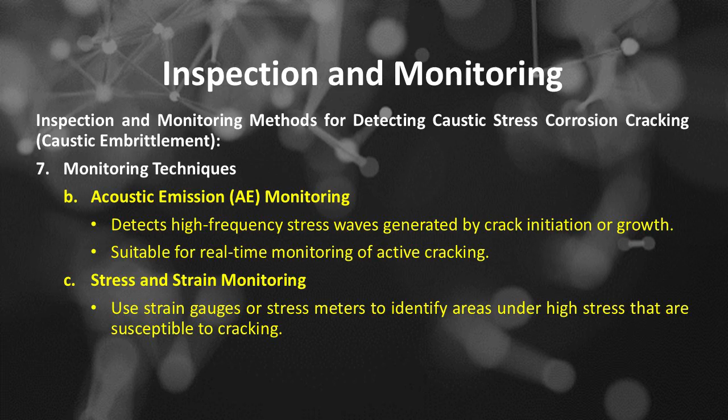Monitoring techniques, B: acoustic emission monitoring detects high-frequency stress waves generated by crack initiation or growth, suitable for real-time monitoring of active cracking. Monitoring techniques, C: stress and strain monitoring, use strain gauges or stress meters to identify areas under high stress that are susceptible to cracking.

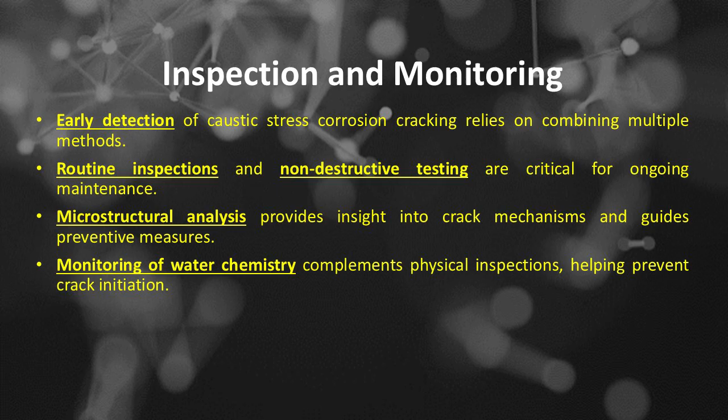Monitoring techniques, D: regular inspection schedules - implement routine inspections based on risk assessment, use a combination of visual, ultrasonic, and dye penetrant testing. Early detection of caustic stress corrosion cracking relies on combining multiple methods. Routine inspections and non-destructive testing are critical for ongoing maintenance. Microstructural analysis provides insight into crack mechanisms and guides preventive measures. Monitoring of water chemistry complements physical inspections, helping prevent crack initiation.